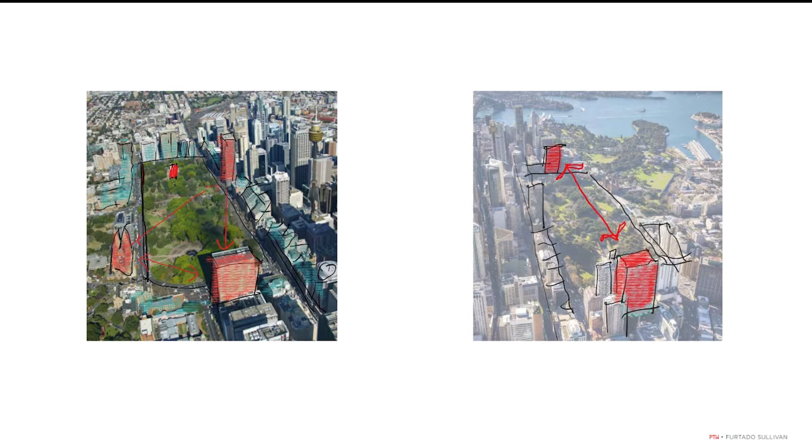We looked at what the appropriate role was for this site. You could take a bookend approach, saying this building should be conversing with the building directly to the north, with some sensible relationship between the two. But that was contrary to the idea of the curtilage to the space being a frame, and a frame shouldn't interact with the painting. So the buildings shouldn't be trying to mark or identify themselves, they should be trying to become part of this reasonably inert curtilage to the memorial.

So we ended up thinking, well, let's just look at the south side of the park. There is some unusual consistency between each of the buildings. Yes, you can't avoid the fact that the envelopes and the axis required this geometric relationship with the memorial, but you can compose the building and its materiality and form with the neighbouring buildings, and that was the approach that we took.

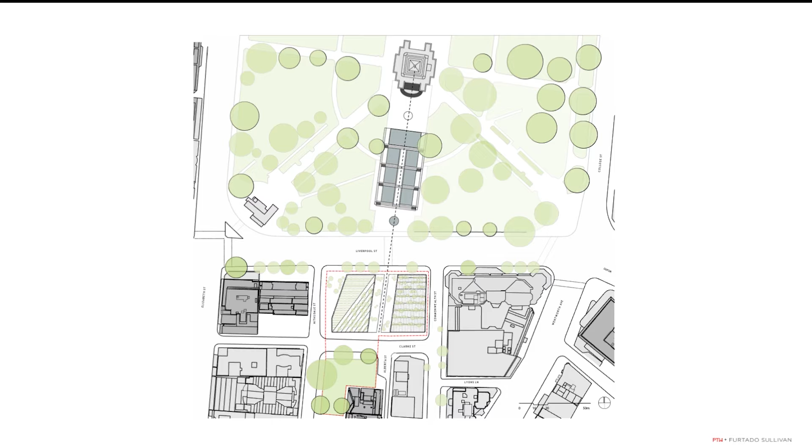At the ground level, we tried to use the geometry of the space to generate the forms for each of the buildings. One of the challenges with the building envelopes was their unusual geometry, and we looked at the geometry of the park, the relationship with our site, and came up with a strategy, which I'll let Sandra talk about, for how we were going to achieve the GFA without an overly busy architectural form.

So we ended up with this composition, and I have to say, even now looking at this, there is too much similarity in the axial composition between the buildings and the memorial. It's very, very difficult. I don't know what you can do with this, because we're trying to respect and enhance the memorial, and we have this fundamental composition which is generated by the memorial. So it's an extremely difficult architectural problem. I think our approach of taking a muted, curtilage-type relationship with the adjacent buildings was the right approach, but there is this fundamental challenge in the nature of this site and its relationship with the memorial.

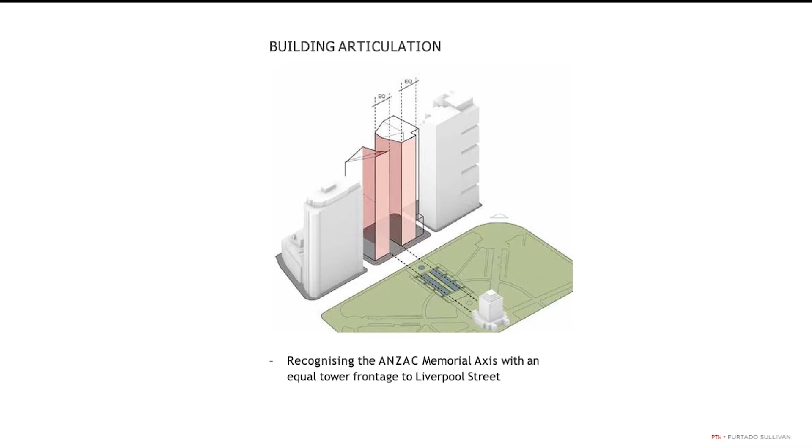Just very quickly to talk about the basic strategy to our massing: we have the stage 1 DA envelope, and we have the requirement in the competition for daylight to come to the central breakthrough on the axis. We ended up taking this approach where we broke the building into two. You can see on the left-hand side there's a bump coming off the western building - we thought that was undesirable. It would be better to have simple, pure forms to calm the composition down. We generated a form by looking at the viewpoints from the memorial, which created an angular axis allowing us to achieve the optimal GFA and remove that bump. So that was our basic strategy.

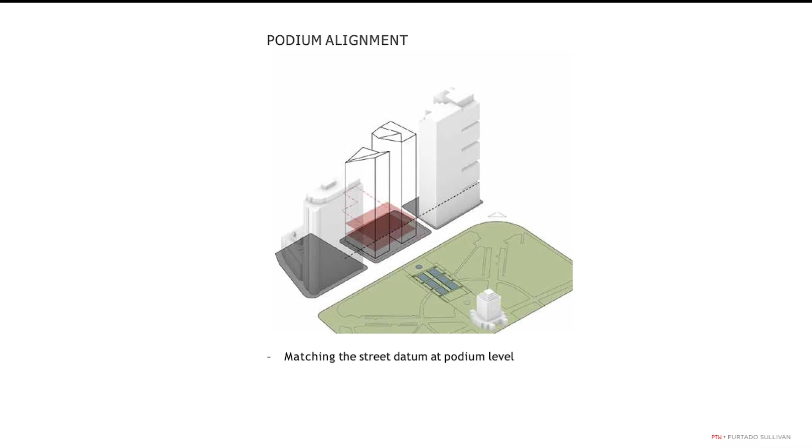Over to you, Sandra. Thank you, Simon. The other strategy was to acknowledge there was a requirement for a podium, and while we wanted to bring the towers to ground because we wanted to simplify the relationship between the tower and the podium, we still wanted to have something within the building that created that recognition, sitting broadly at the podium where it was defined.

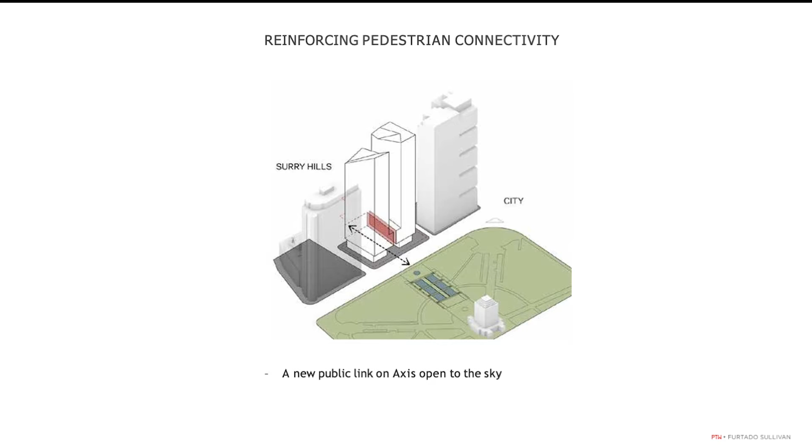The one thing that Simon broadly spoke of was the notion of recapturing the GFA that we had lost by being almost too anal, if you'll excuse the English, about having these two frontages equidistant and therefore achieving the perfect geometry.

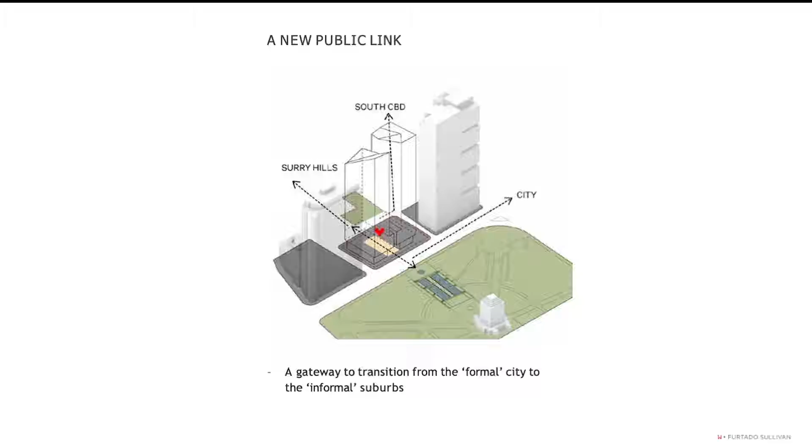So we decided to fill in what was originally meant to be a celebratory space in a plaza, turning it into a through-site link. That link really created two different worlds: the world of the city and the world of the neighbourhood. We didn't want the space between the two towers to be a place to stay and look upon. We wanted it to recognise the axis, celebrate the axis, but be a point of arrival and departure.

That created different types of characters for the different places within the master plan. The final piece in the articulation of the volume lay in how we treated the roof. There was a very strict height plane to protect sun access to Harmony Park, and obviously the always-needed GFA - and the more GFA you have at the top, the more value there is. So there was almost this intricate cut and articulation of the top of the towers to achieve that.

So, simply, the way the diagram of the tower works in its northern elevation is described here. We had two rounds in this competition, and had the opportunity to refine some of our ideas in the second round.

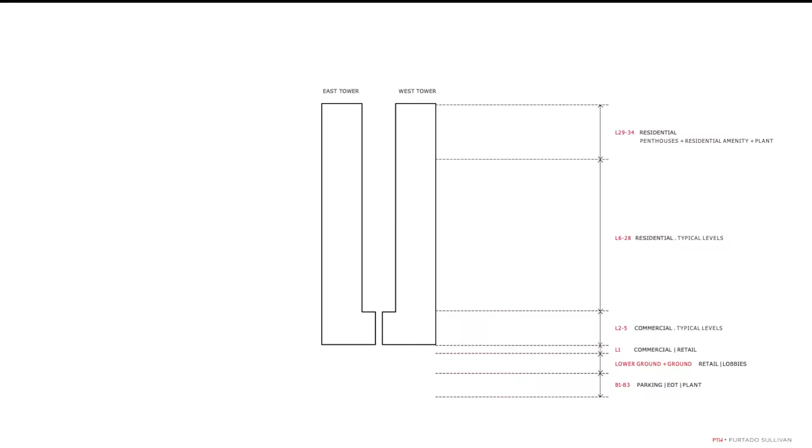One of the comments raised by the jury was the potential lack of time we had to really resolve the ground plane, and also the notion of the diagram of the tower coming to ground - what it meant in terms of weight and materiality, and how it related to the streetscape, so that you really understand the diagram of the tower.

There was a real desire to have a very simple, calm facade, as Simon mentioned. We used the same modulation grid because of the proximity between the towers, but had a different strategy for the facade in the middle.

The only thing to note, especially in high-rise residential, is that it's very difficult to obtain proper fresh air into the bedrooms. What we did was effectively create Juliet balconies for every bedroom so every room had proper fresh air. This is really the way the tower is represented from the south, and the ground plane, with the different characters within the street.

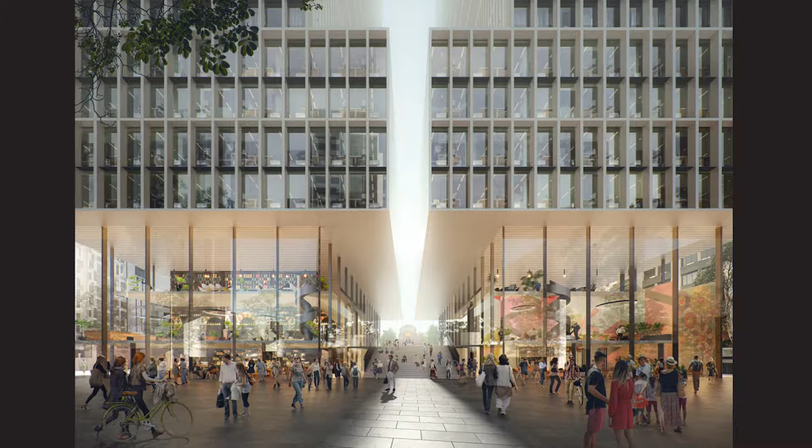It's very hard to understand exactly what we did in terms of acknowledging the axis, but it was this notion of these two podiums almost touching together, using light to come to ground to really celebrate the movement. This was the work we did on the second round, where we felt there was perhaps an opportunity to humanise and create a more human scale on the plinth, by creating a plinth on the tower.

And just very quickly, the two images that describe effectively how the scheme came together towards the end. Thank you.

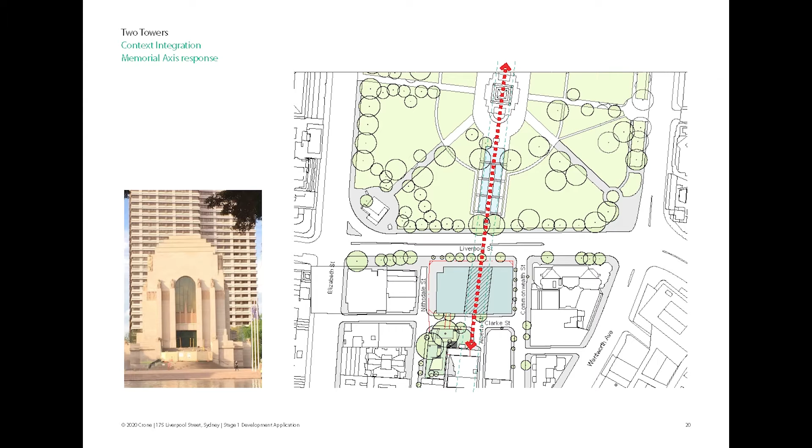Beyond the fact that adaptive reuse of the existing tower wouldn't comply with minimum floor plate sizes for residential, cross ventilation and solar access become extremely problematic. Working closely over a journey with a relatively small team of Crone, Ethos Urban and others, we collaborated closely with the city to find an urban outcome of benefit for the client, but also for residents - particularly those south of this site, where solar amenity is significantly improved.

I think as an incumbent stage 1 DA architect, it can be challenging. Sometimes there's too much baggage moving into the competition, questioning every move based on conversations about technical constraints, and also the fact that because it's a complex and extremely sensitive site, you show your cards at stage 1.

There's a very intentional response to materiality, to the formality of the memorial axis, as a response to Sydney's colonial heritage, both formally and materially. So thinking about how you then evolve that thinking into the competition...

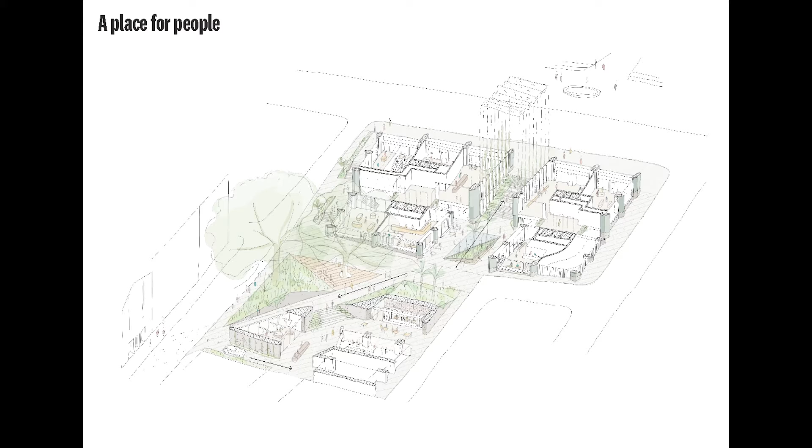Down diagonally from the site, just to the southwest, is Australian Hall, which was where the Greek community opened up their facility during the freedom protest in 1938. But it's so significant - in immediate proximity to this site is a very significant location for the local Aboriginal community, so we thought there was potential to deflect that strong axis through the site using landscape, to then direct it through to Australian Hall, down on the bottom left.

Okay, next one. So deflecting the axis - this powerful gesture of the axis. We looked at various things in how we resolve the design, a sort of stacking strategy with a tightening grain at the top of the building, maybe counter-logic, and just having that very clear expression of the void in the sky.

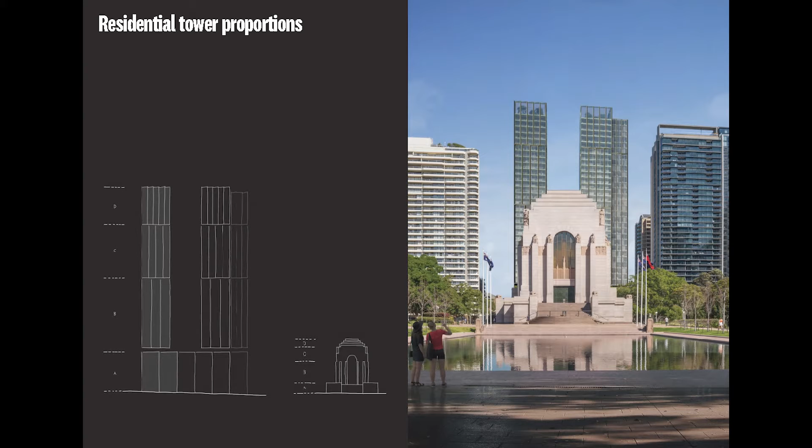The stepping form persisted, I guess, from... It's really interesting to see in the previous scheme the resolution to avoid that, which is quite insightful.

I guess here is the stage one DA aspects that were so strong from the concept DA, but we thought maybe we could just inflect that northern end of the facade to pick up on the fact that the axis of Hyde Park is not perpendicular to Liverpool Street - it's actually about a 7-degree offset or something. So we thought that was a potentially strong generative aspect in the design.

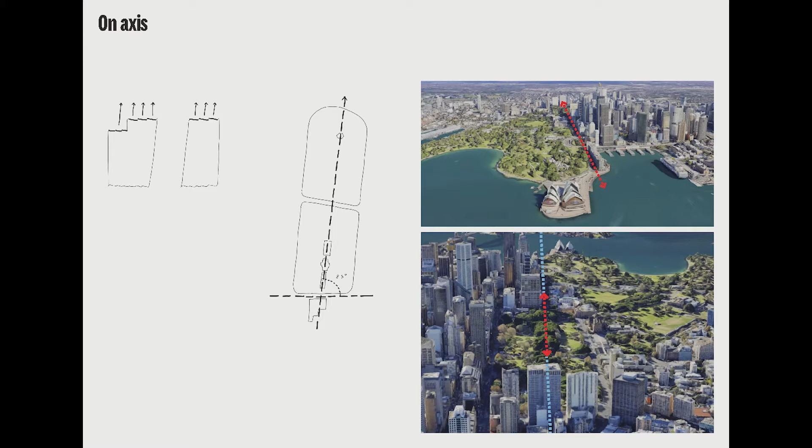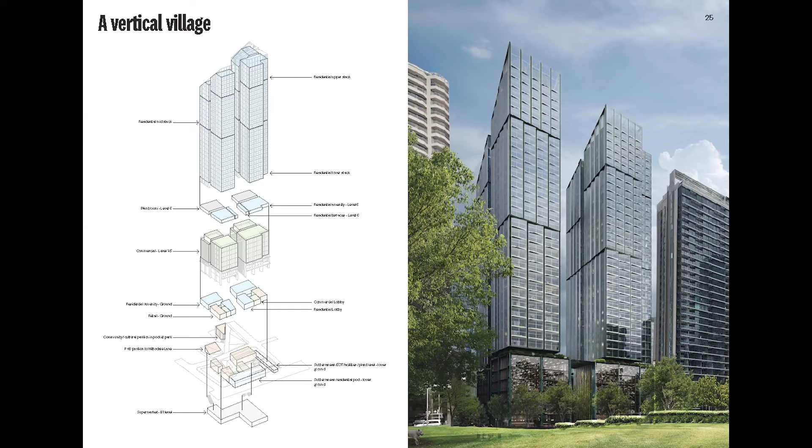Probably ultimately a fairly glazed tower, I'd say. Yeah, very high glazed ratio. In hindsight, let's flick through this and we can see why we didn't win the competition. But in saying that, I think we're extremely proud of the conceptual framework, and given the right execution of that conceptual framework, this could have been an amazing project. It's that sort of leap from urban design to architecture that maybe didn't quite translate.

Simple floor plate, serrated facade on the edges to try to capture the axial views. The value of the northern view and the northeastern view in Sydney is so powerful - this is a dress circle site, which you can see resolved through the floor plate. That simple cross through the middle area, and then with the break either side, so a real breadth into the core of the building.

I guess it's sort of interesting to see this asymmetrical height plane, how that resolves against the logical ultimate formality of the building. I think it was certainly a challenge, because it's quite a radical formal requirement, but the conflicting requirement is this very calm backdrop to the memorial.

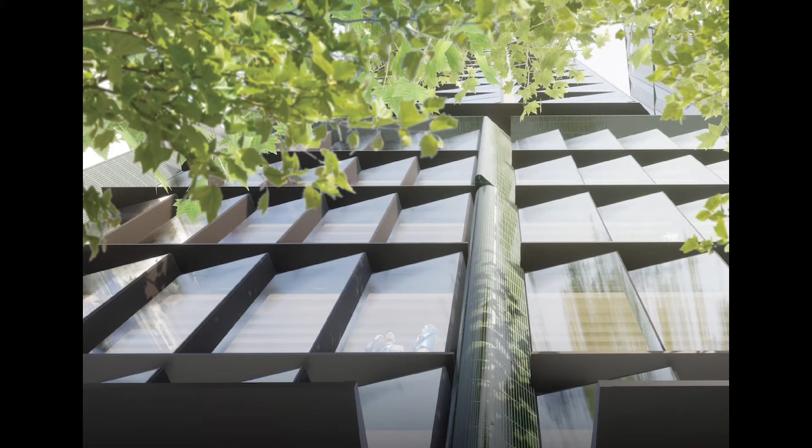I guess the presence of, what were we going to say about the podium? It's kind of the opposite of that. It's that really recessive response, picking up the tones of the park. We know that the greenery in Hyde Park has formed a recessive backdrop to the memorial forever. So why shouldn't the building?

As I said, stage one explored the idea of a warmer toned Sydney building, and this was intentionally looking at the buildings next door and saying, maybe that glassy backdrop with some deep green quality materiality in the podium is a better response for this location. As an aside, it's hard to win a design competition with a green tower. A lot of people lob them out there, but they never seem to get up.

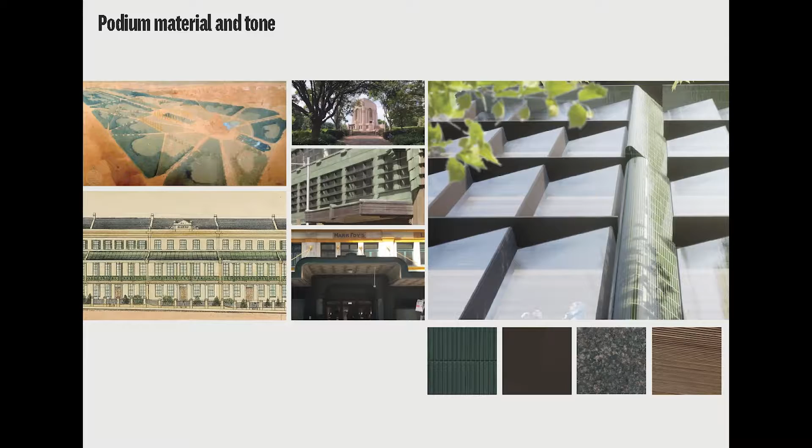The simple materiality, responding to the original terraces that were on the site. Generous thresholds, eaves.

Trying to have a sense within that central space, which was the compromise in the previous scheme, rebalancing that GFA to compress the central space, which had a certain intensity but maybe opened the view to the memorial. Sky curtilage around the memorial was valuable, and trying to have a sense here of that character of the arbour of Hyde Park brought into the site was positive.

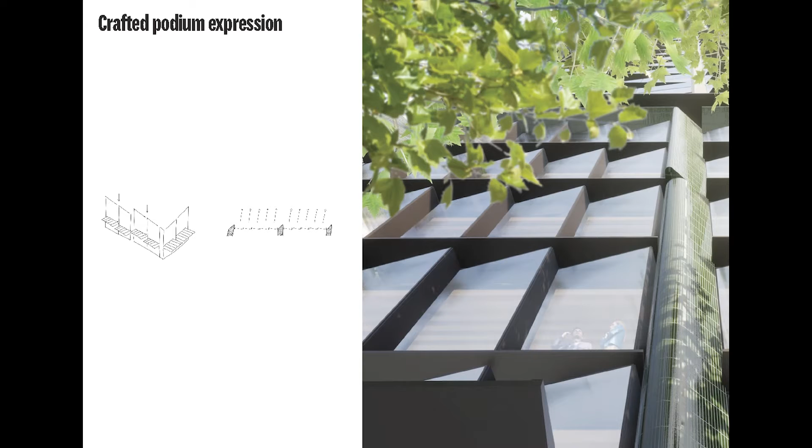Crafted podium expression. This moment where that axis deflects, back towards Anzac House, which also relates to the sort of asymmetry at the top of the tower.

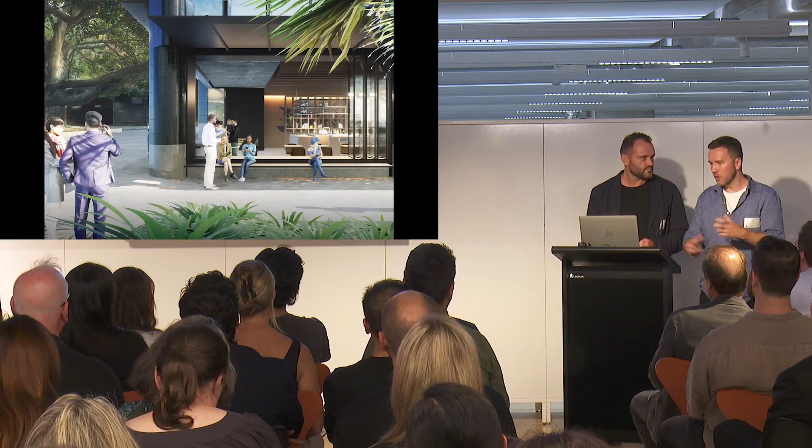The key difference there was bringing the stair down directly from Liverpool Street so that the public space belonged more to the Surry Hills threshold than the CBD. The thought was, if this wants to be more vibrant with activated bars, then maybe the sensitivity of the Liverpool Street frontage is better left alone, and you come down more immediately into that precinct that then has the potential to evolve to the south.

And the sort of intimate tone of various small tenancies, etc. Thank you.

So we started by recognising that we needed to reconcile the formality of Hyde Park and the Beaux-Arts axis with the sort of gritty urbanism on the other side of Surry Hills, and how do we do that? And then we spent a lot of time thinking about how do we respond to Dellit's memorial and really that formality, and how do we create a very calm civic backdrop to that building. I guess you'll be the judges of whether we were successful.

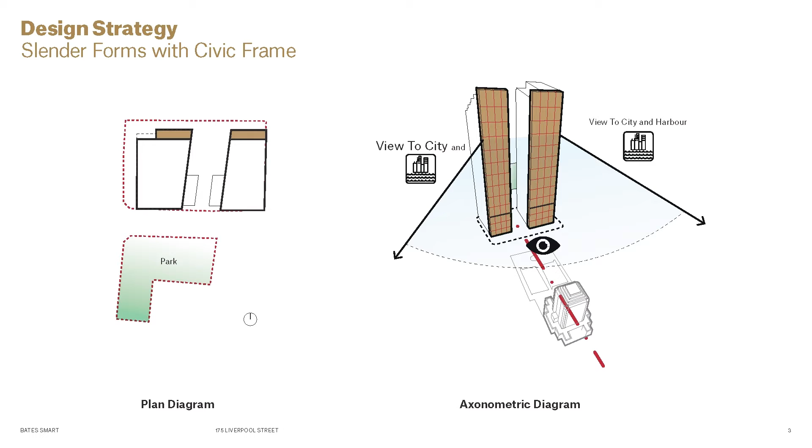We started, and you've seen similar responses, by creating a pair of towers that were identical, recessing the western edge and creating two very calm civic frames behind the War Memorial, picking up on the materiality of the War Memorial. The base uses the actual stone of the War Memorial before progressing into a precast that is tonally from the War Memorial.

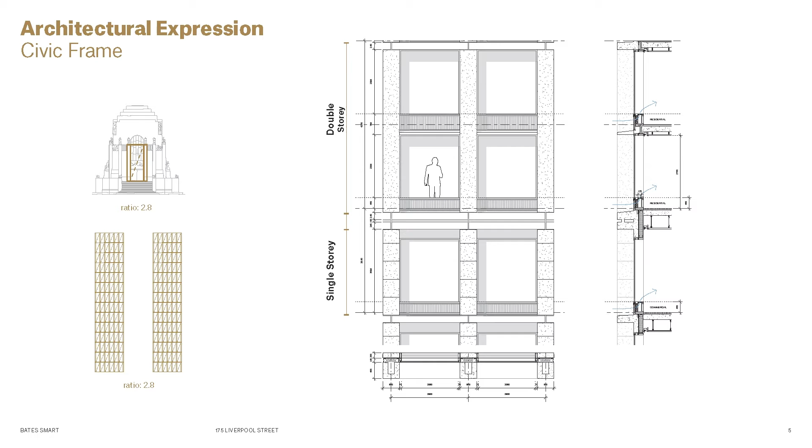We took the proportions of the War Memorial. We spent a lot of time studying those proportions. We took those into the tower. You can see here, this is the precast, and there's a double band where it breaks into the podium. So those materials and proportions are used.

We actually spent a lot of time in the competition, Sally and I and other members of the team, sitting on this park bench and imagining what a pair of towers that framed that War Memorial would be like. And we were after something that was calm and very civic.

And then from the other side of the memorial, you can see those towers come to the ground. The important thing we did was widen the podium base and create an urban room that acknowledged the axis of the War Memorial.

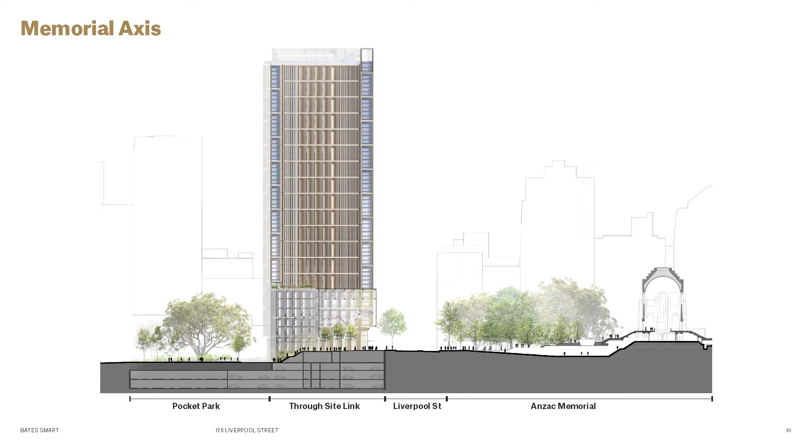You can see that urban room, it's 17 metres wide and it's on axis. It takes the full thrust of the space of the War Memorial into that space and creates a north-facing urban room on level with the War Memorial, and before it cascades down into Surry Hills. So it's quite a formal space.

There is a glass screen between the two towers, and you have this wind-protected north-facing space on axis with the War Memorial. We brought the water element through on the other side of Liverpool Street into this room, which is a very calm space with cafes on either side.

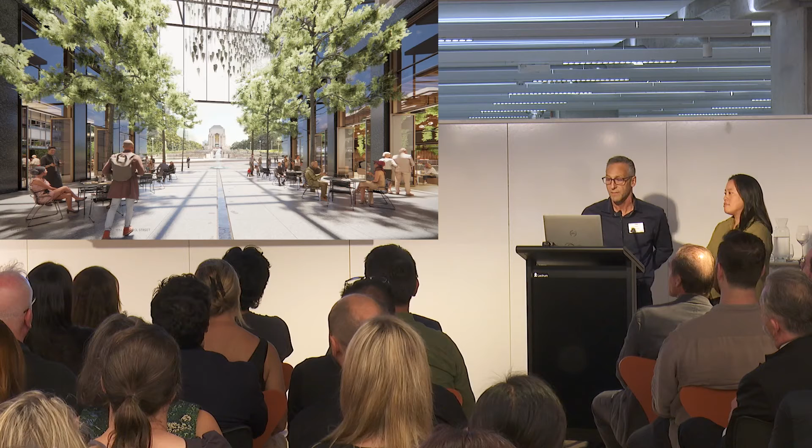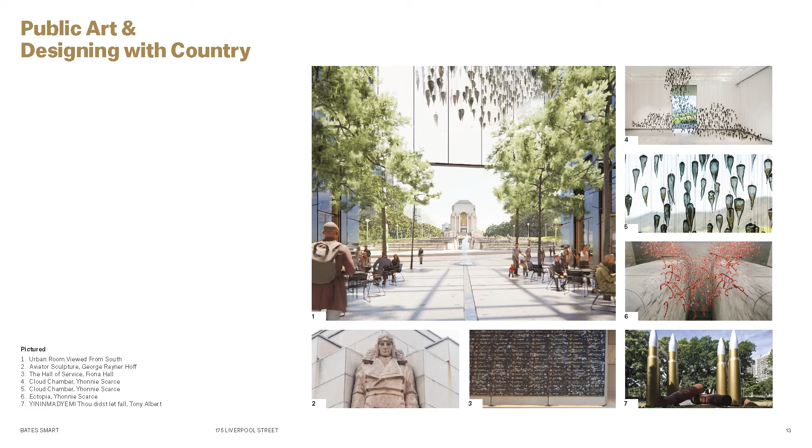We worked with Barbara Flynn, art consultant, and Yhonnie Scarce, artist, looking at an artwork that was hanging in that space, getting that vertical dimension, forming a suite of artworks that, as you probably know, span all around the War Memorial. So we were looking to, and still are looking to, complement those artworks in the bigger picture.

The base of the building, as I mentioned, we were replicating the exact stone that was used in the War Memorial, and we created a formal colonnade that runs along the street. That colonnade again takes the proportions of the War Memorial and creates a generous two-storey colonnade.

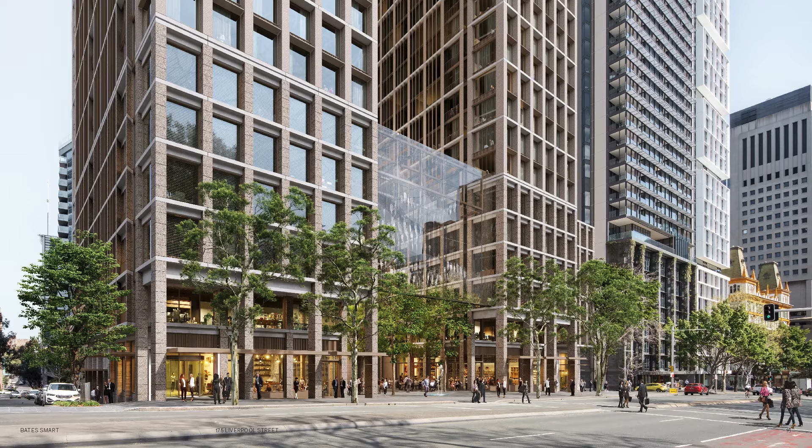You can see that colonnade running through here with the glass screen separating the two towers, and how the podium aligns all the way down to the Mark Foy's building, and then the shift from the stone up to the precast.

The final formal move was we pulled together the buildings to a 6-metre laneway width at the end and created two smaller 6-storey buildings acknowledging the scale of Surry Hills. You can see there, on axis with the War Memorial, it's a nice tight space that came together.

We were looking at a sort of 6-storey warehouse masonry building, acknowledging that Surry Hills typology.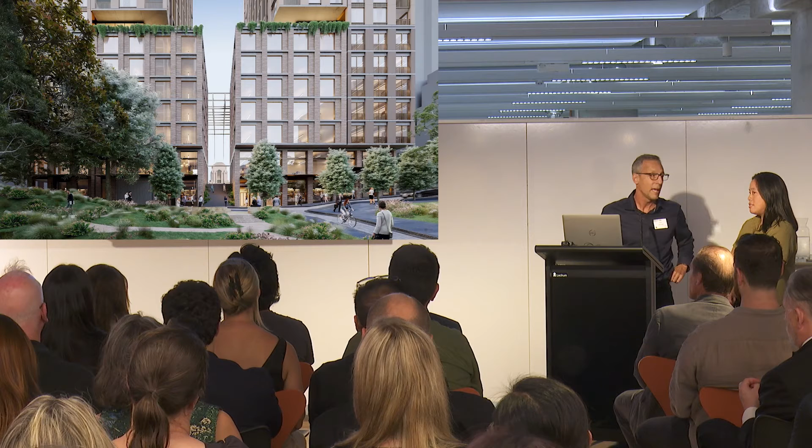We also worked with Sacha Coles and his team at Aspect, and Janice Constable, Design with Country consultant, on a landscape work that had a yarning circle and another water element again on axis, but starting to become more informal as you move through to Surry Hills.

These show the contrasting north and south elevations. The south elevation has the informality of Surry Hills and these 6-storey warehouse-like buildings playing off against the formality on the north side.

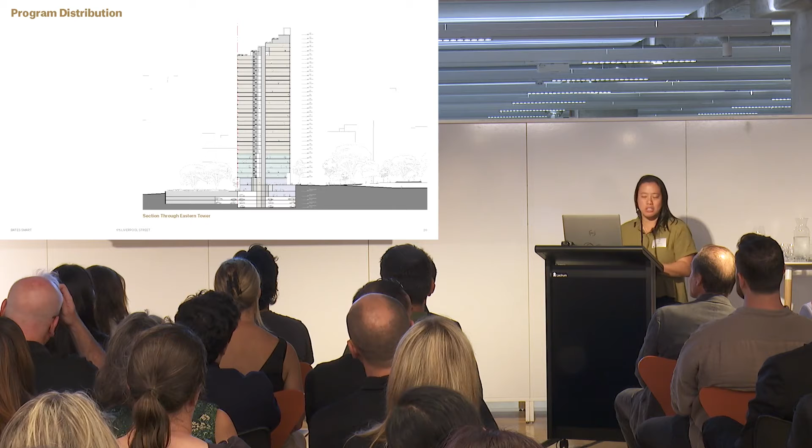The program is stacked from bottom up with car park down below, retaining the existing basement shell, with the southern end provided for the pocket park. We wanted to provide as much deep soil as possible in retaining the pocket park.

Moving up, we have 2 levels, so Pitt Street and Clark Street are a storey apart, and just above and below we've built it with as much retail as possible to ensure the precinct activates. Above that we have 5 storeys of commercial, and from level 6 all the way up to 35 is residential.

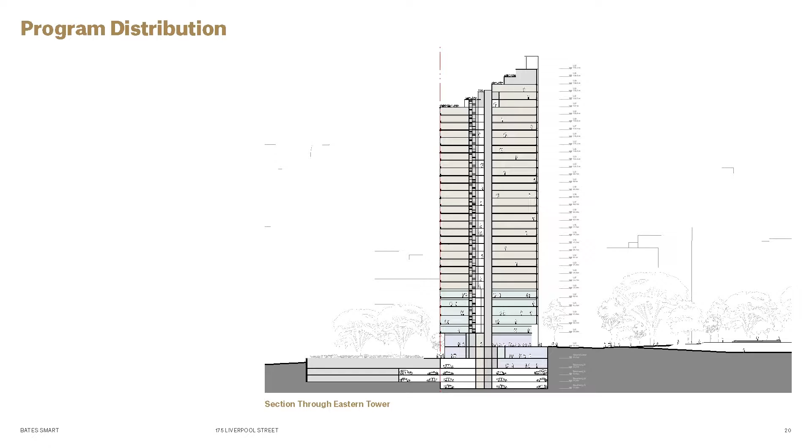You'll see that it tiers to respond to the Hyde Park Sun Access Plane, which we take very seriously. It's our backyard, front yard that we look out to every day, and to ensure there is no solar impact to that. Jumping in here, we're looking at the upper ground level plan.

The memorial axis as introduced by Philip is seen in the middle of the plan here. We've taken the planning control from the planning proposals of 9 metres and reviewed how we can make this most successful. So we expanded it to the north to create a place, and narrowed it down on the southern side to respond to the Surry Hills Laneway.

With that, we've located the commercial lobbies on either side of the towers, having distinct access to Liverpool Street. We also still wanted the residential towers to have a distinct Liverpool address, which is the most premium, so we've located the entryway inside the urban room where number 4 is located.

The urban room allows us to maximise the retail fronting it inside. We've worked with Arup to ensure the wind engineering is optimal so that we could slow down the wind coming through, which otherwise would have been a very strong thoroughfare. Retail is able to spill out inside and also to the north around the colonnade.

As we go down to the lower ground here, this activation across the site is carried through. We wanted to maximise the retail, both upper and lower ground, so you can see that it also fronts to Clark Street, with opportunities for large format retail in future activations.

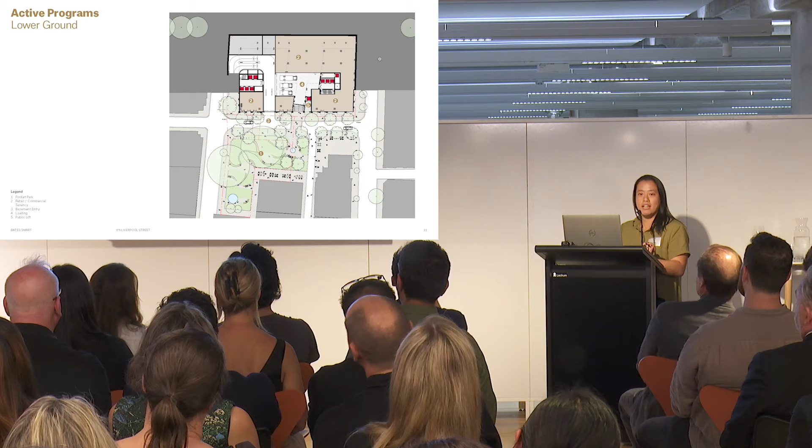We worked with Aspect and Janice Constable to offer an at-grade pocket park, which if anyone has been around currently, it's an elevated pocket park that seems very private. We wanted to make sure that though privately owned, it was publicly accessible.

Connecting with the Connecting with Country strategy, allowing a yarning circle to be a terminus, this echoes a strategy to allow for the southern access to be a journey through a sequence to the Anzac Memorial.

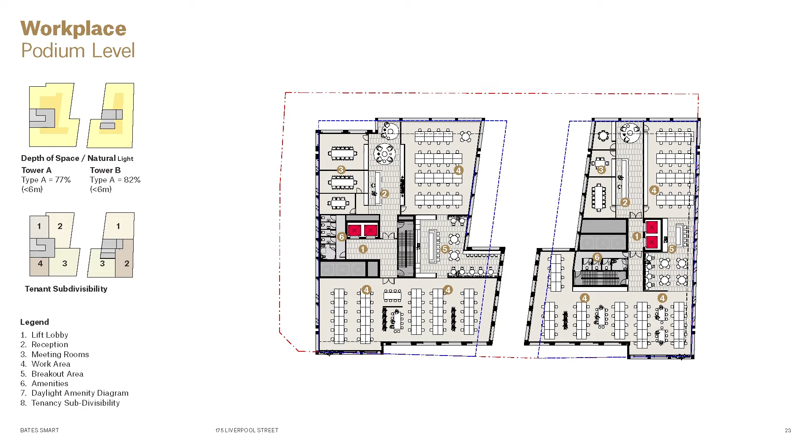As we move up the building, the commercial floor plate was something we were grappling with as we were designing. The previous envelope would have had a very tight building separation. As we introduced the urban room, the commercial floor plate now has opportunities to maximise daylight access from all areas, as well as appreciating that Surry Hills has smaller enterprises that might want to enter in this location. So tenancy subdivisibility is absolutely optimum here.

As we move up, we made a deliberate attempt to carefully curate and design a typical floor plate that is carried from bottom all the way up before we had to step to allow for sun access to Hyde Park. We had an opportunity to maximise views out to Hyde Park and Sydney Harbour, so all of our living rooms are fronting north, or if not, in corner locations. Almost all of our units are dual aspect, which offers opportunities for maximum cross ventilation and solar access.

As we jump into a typical unit, one of our selling strategies was that as we provided a calm backdrop to the Anzac Memorial, we also didn't want any balconies fronting it. So with that, we strategically relocated the balcony that otherwise would have been located in the corner or the north, down on the southern corner.

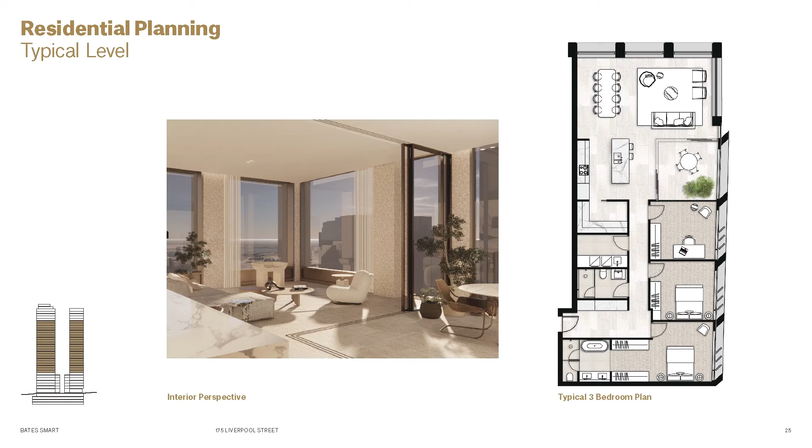We have an 8 by 5 expansive living area for dining and living. And if we double it, including the kitchen and winter garden, this offers a very expansive open plan living suitable for this address. And in summary, we can see it in this render, where this calm backdrop is not only viewed from the outside but on the inside.

The materiality Philip introduced is both on the outside and carried from the inside. Thank you.

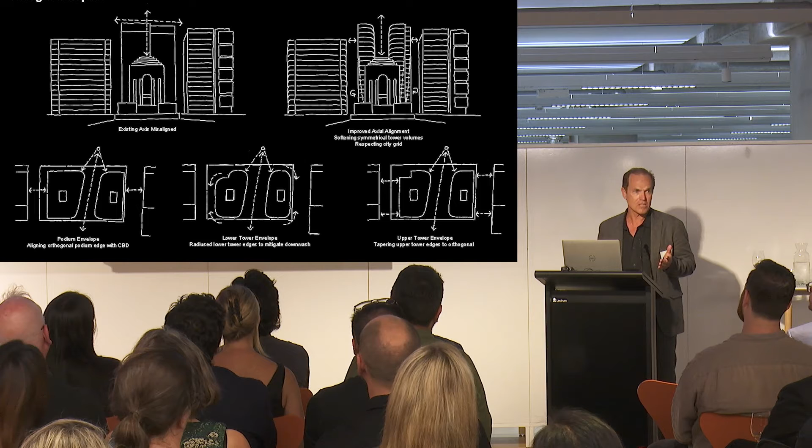I might just start with some of the really early key design principles of the site. Everybody's talked about the mandate from the brief to really enhance the axis of the Anzac Memorial. We noted that there is a misalignment of the axis by about 7 degrees, and so part of the design generation for us was how to actually manage that realignment, and probably soften, as you can see on the top right image, the blow of the misalignment by very soft, curvaceous inner forms of the building, which actually, in a sense, realigned the axis.

We also looked at how lower levels of activity would respond orthogonally on the left-hand image to orthogonal architecture either side of the site, and how in the middle sections of the tower, wind mitigation is a very important issue. We talked a lot to the wind consultants about how to mitigate downdraft into the site and through the through-site link, so radiusing the edges of the tower proper seemed like a really important thing to do.

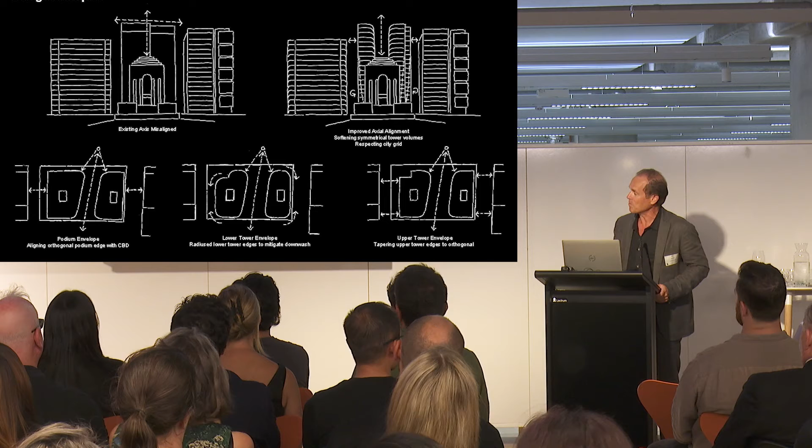But then actually up at the upper levels of the tower, on the bottom right-hand side, to bring the building back to an orthogonal square relationship with the orthogonal buildings either side. So it really did morph its way between the bottom and the top of the site, responding to the context of buildings opposite, responding to the axis which we, in an attempt, realigned with the memorial.

The end result, we had hoped, was to be a soft, discreet and respectful backdrop to the memorial. We spent a lot of time hanging around in the building and sitting in the park, thinking what might best be there to celebrate the memorial without overpowering it. So we elected a very simple palette of materials and a darker tonality, in contrast to the memorial, so it stood out against the backdrop of the architecture behind it.

Again, with the softness of the inner curves of the material realigning the axis, and the softness of the edges as well, contrasting with the buildings adjacent.

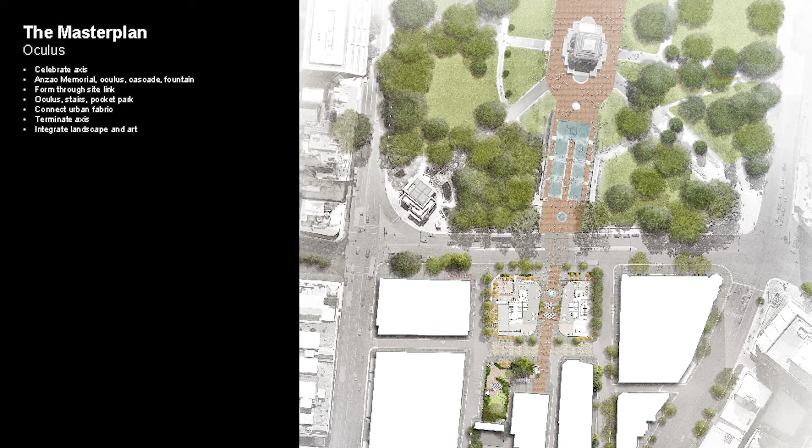So, of course, it all started with a master plan. We worked very closely with Oculus on the ideas of axial alignment with the Anzac Memorial, starting with the building across the cascade, the Oculus itself, and bringing water into an Oculus on our side of Liverpool Street. The axis comes all the way through the park and terminates in an odd space, then turns a corner into the park.

So how can we deal with all that? How can we bury a narrative into the ground plane? That was really important for us. We'd researched some of the Indigenous history that had occurred on this site, and understood there was quite a lot of gaming, and in fact war games, that occurred there at one time.

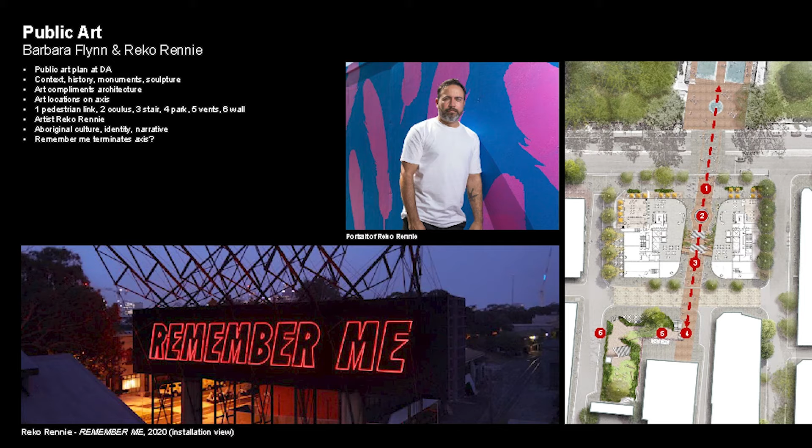So we consulted with Barbara about how to weave art into the narrative of the ground plane, and find places along that axis that would be instant reminders to people walking through, perhaps even a termination at the end where you see a remembrance of the Indigenous past through the site.

To the ground plane, which is king - obviously commercial was a minor part, about 5 levels of commercial at the lower end of the building. We elected to bring our commercial lobbies in from Liverpool Street, where all the action and activity is, and the commercial world facing the park. So 2 lobbies mirroring an Oculus there in white along the pedestrian link.

A retail opportunity on the top left-hand corner, also could have been a bar or cafe facing back into the CBD, with as much activity as possible along the ground plane - which, for people who didn't know the site well, actually descends by about 4 or 5 metres from memory back down towards Clarke Street on the south.

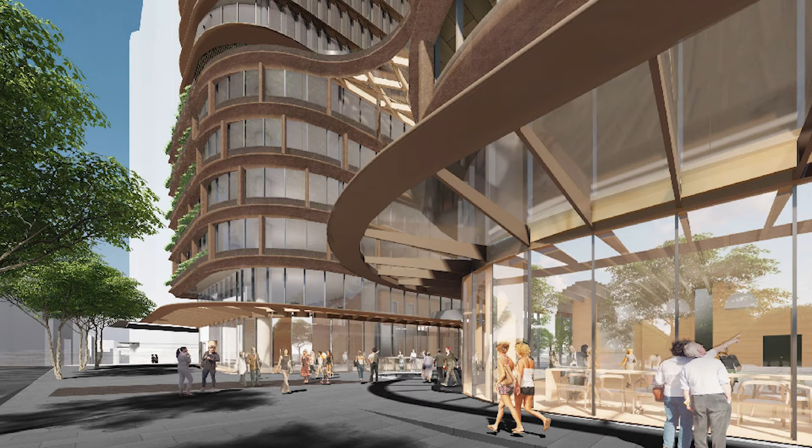So again, those commercial lobby spaces celebrate whatever picture-framed views of the memorial are possible, but become active spaces, be they cafes or bars, doubling into commercial lobby spaces as well. At the Liverpool Street end, people flow through and are invited into the pedestrian link or plaza area, protected from any downdraft from the building by very transparent canopies above.

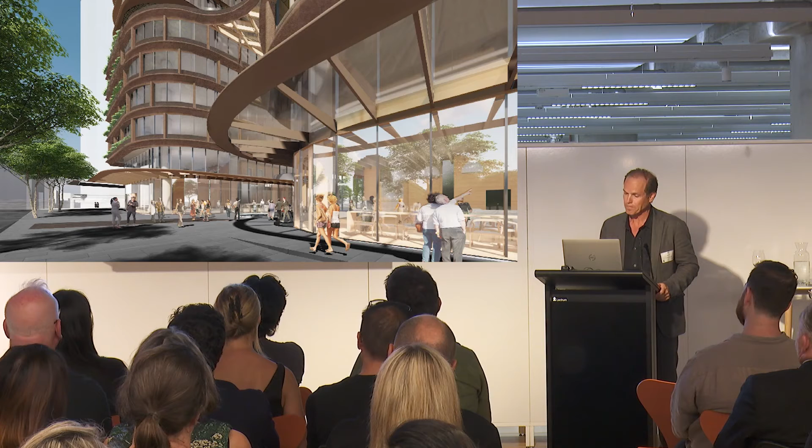Down at the lower ground area, coming down at the Clarke Street level below, this is where we elected to bring in the residential lobbies, with the feeling that it was a more quiet and safer zone to be in than Liverpool Street with all the activity, the buses and the action of the CBD. So you can see 2 residential lobbies mirrored either side of the pedestrian link.

Again, retail activity and F&B activating the Nithsdale Street side, and all the action associated with EOT facilities, bike parking and so on, with a little bike shop happening also in that space below an open Oculus above, going up to the through-site link at ground level. So lots of activity where possible at the lower ground space as well.

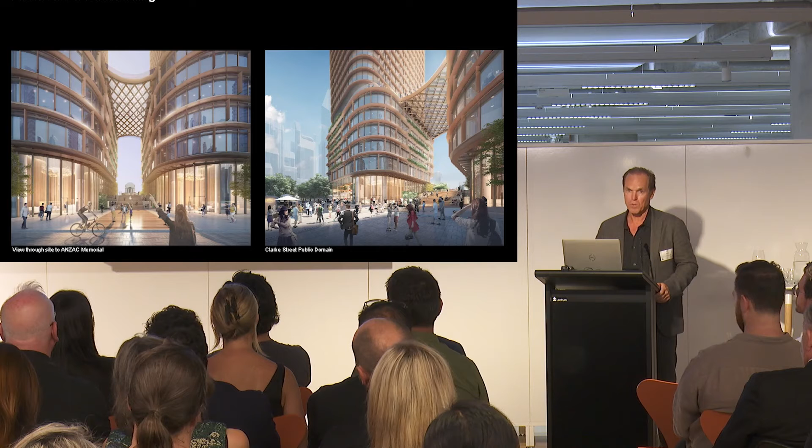By pushing the stair forward towards the memorial, we were able to frame a view - I saw a very similar image in the Bates Smart show - to celebrate the view from Clarke Street of the memorial. It became an amphitheatre, almost a performance space embedded with artwork, framing the memorial, which is another element shared in Philip's scheme: to create a glazed protection from the elements, wind or rain, so the through-site link became an all-weather space.

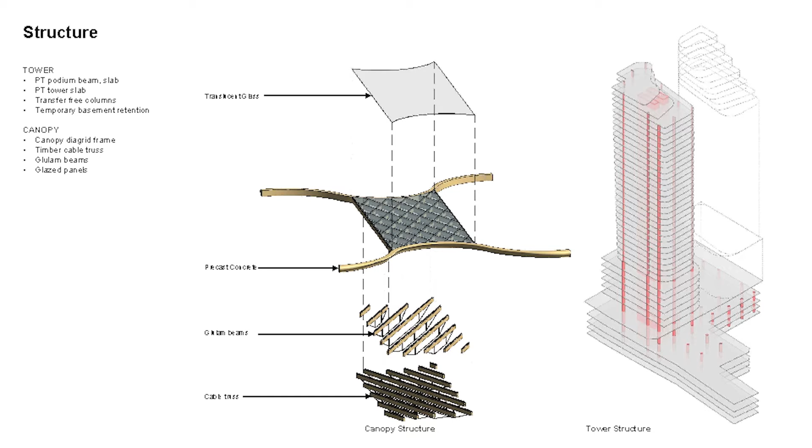That could have been a lot of fun. We looked at timber cable trusses and glass diagrids that could even be trafficable, linking people across the podium spaces. And then, of course, the 5 commercial levels.

There aren't many of them, so they become boutique, essentially, as commercial spaces with paired commercial lobbies either side of the pedestrian through-site link. We did this during COVID, so we buried some little meeting spaces and telephone spaces on the right, giving as much daylight and amenity through northern views across to the park as possible, because we know that from there you can get views across to the Anzac Memorial, right across the other end of the park.

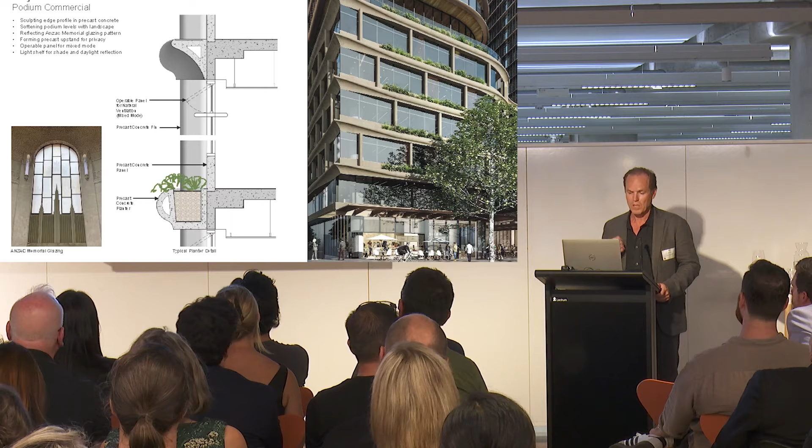Some of the cues we took for the design of the podium were born from the memorial itself. We saw a very interesting split grid facade, which we rotated 90 degrees for this podium. There was a requirement in the brief for quite a high percentage of solidity in the podium facade, so we used sandstone as a soft, discrete material. We buried landscape into the podium facade to draw landscape across the park and into the building itself, and used precast materials where possible against the backdrop of the memorial.

You can see here how the podium was designed to follow the datum line of the Mark Foy's building also across, so the Connaught building became the only building without a podium, but it was important to continue that datum line, we felt. The fun stuff above the commercial levels was obviously a chance to have some residential amenity.

Be they swimming pools, a club lounge, a co-working space, a little theatrette and a gym - all of those were right at the treetop levels with terrific views towards the north. And in fact, we cheated a little bit here. We sent a drone up, and I'm sure we could go to prison for doing it now, but we did that just to see what you could see from 30, 60 and 120 metres and where the best aspect for residential apartments became, and designed those apartments.

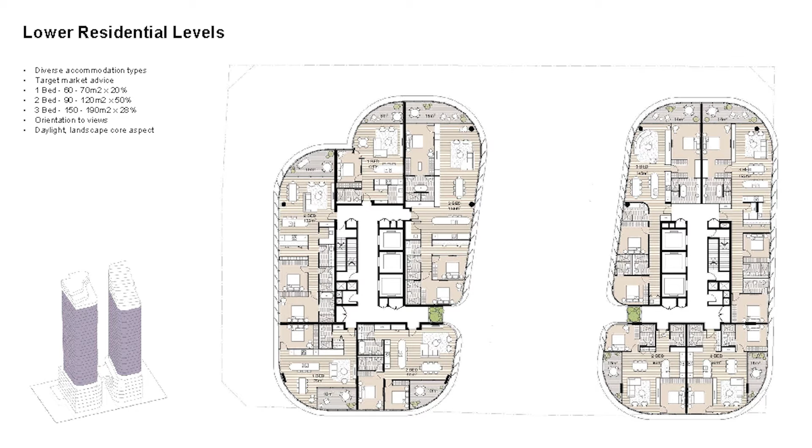You can see on the right-hand side of both these plans, which are the typical apartment levels, the main apartment being a 3-bed one with the better view towards the northeast, packing as much aspect of view and daylight for each of those apartments to the north as possible, even some of them on the south edges actually sneaking a view through the gaps towards the north also.

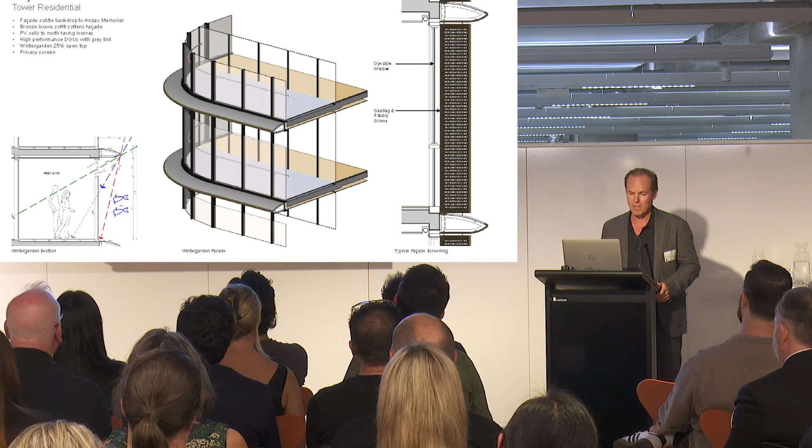How that was done through shading and winter gardens. We elected to use a winter garden technique but with an open top to it so that it became a naturally ventilated space with a bronze bullet awning, which allowed shading for hot northern high sun while allowing low winter sun to penetrate into the apartments.

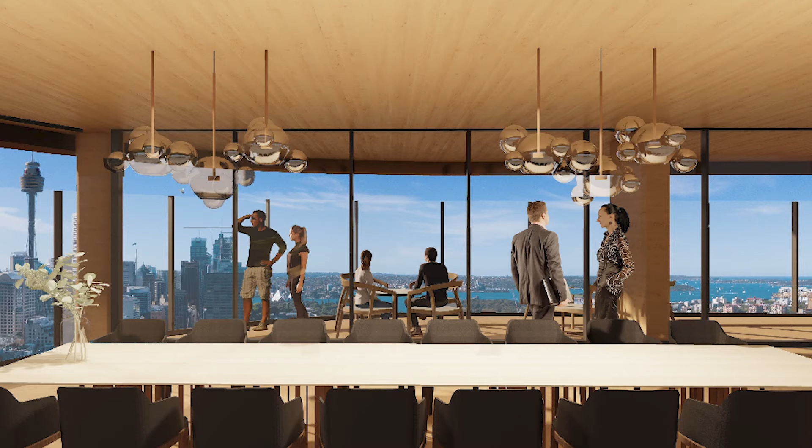And the great fun again right at the top of the building was possibly another sky lounge, something for the high rollers to come visit, and some rentable space for residents and guests to have as a dining or lounge facility with terrific views over the harbour. That's from one of our drone shots, and the inevitable mega penthouse at the top for the really high rollers - just one of them, a 400 square metre apartment with heroic views.

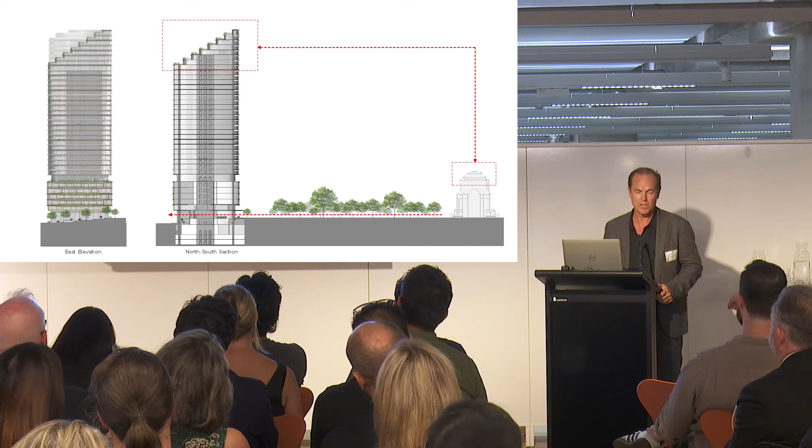This was all about the top of the building, and I think Graham, who's here tonight, somehow kept on saying the fifth elevation, everyone's got to get that right, and I've always remembered that. So we really tried to treat this rooftop as an elevation of the building, and it steps down through the sight lines of the building, but we really tried to imagine that as part of the language of the Anzac Memorial itself, the ziggurat form, which was replicated from the memorial to the rooftop, and in fact used clues from the centenary extension.

Beautiful, beautiful piece of work with some really lovely materials which we brought back into the building - the precast concrete, the bronze detailing and the timber through the building, through the stonework at the base and in the podium, the glazing, charcoal aluminium framing, bronze detailing and timber soffits.

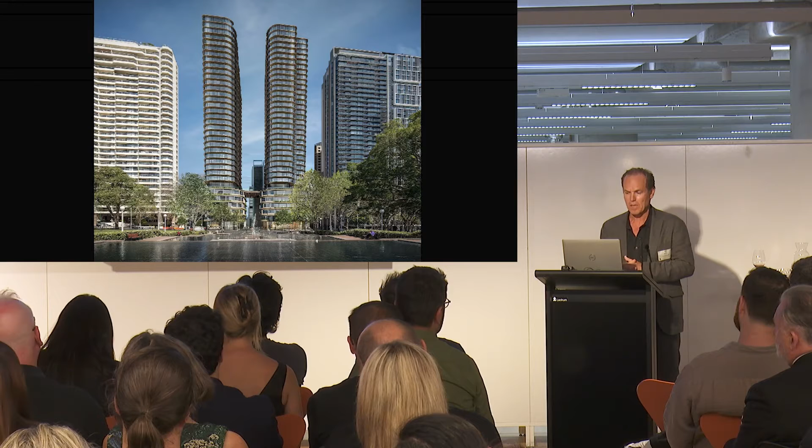So in the end we tried, as I said, to create a very discreet backdrop to the Anzac Memorial, something which is soft and curvaceous, recessive, and has more of the tonality of the Hyde on the right-hand side than the Connaught on the left, because we felt it was probably the best way to be respectful to the memorial itself and create a really lasting thing for the city. Thank you.

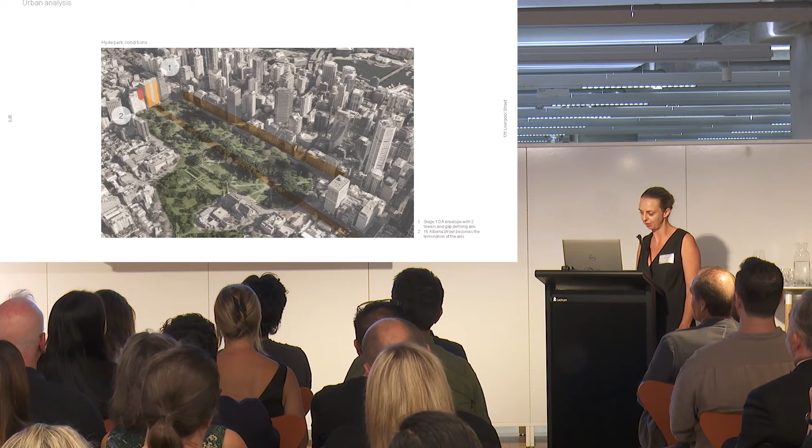It is an extremely important axis for the city. We 100% agree with that. But we did question whether it should be terminated at the back end of Surry Hills by this building, creating a gap.

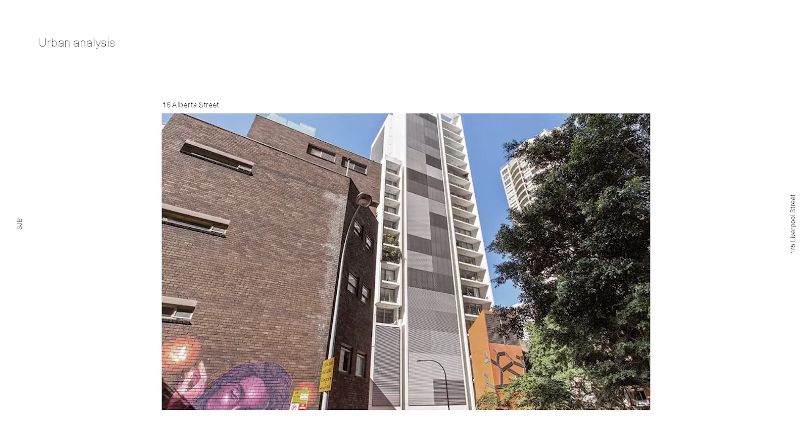The axis, in essence, stops at this site. It is the termination point before it drops into a gully of Surry Hills. And unless we plan to continue a line of demolition through Surry Hills and south, it's never going to exist on this site.

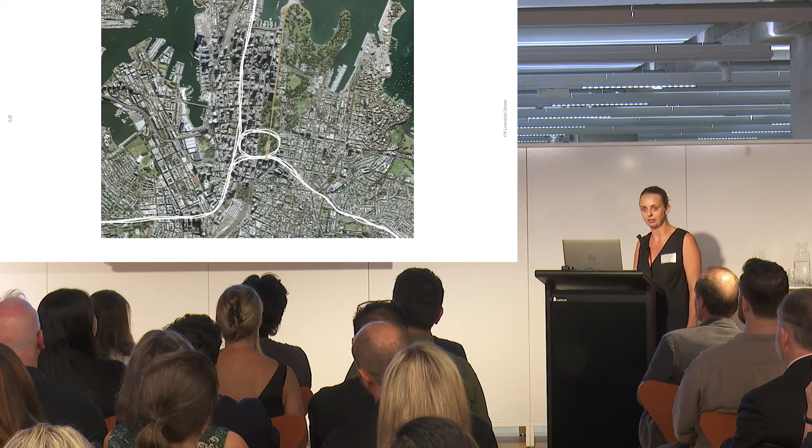And historically, this is also the starting of a ridge line that connects to the eastern coastline of Sydney. It was a First Nations walking track that we now know as Oxford Street, and it also connected around to Parramatta Road. So it has importance for other reasons.

We see design excellence competitions as an opportunity to really push city making, and there's some really key sites in the city that deserve this, and we think this is one. We all have seen how important the axis is.

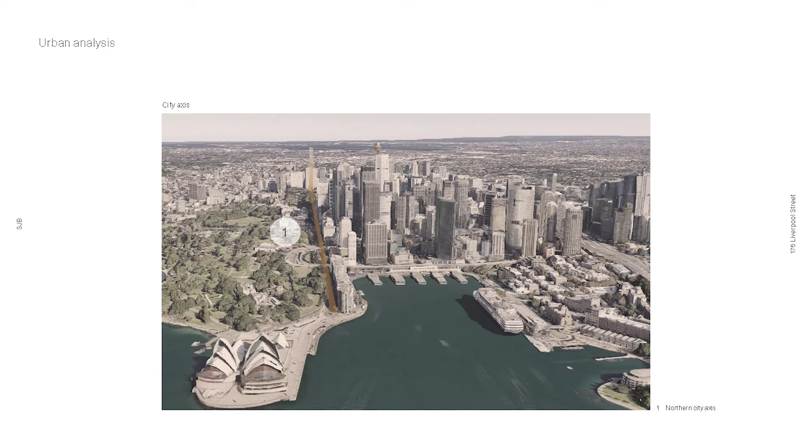Rather than terminating that with a gap, we think we should terminate it with a marker, and we took quite a different approach in the form to achieve that. Not dissimilar to what other European cities do. You build a monument on the axis, you terminate it with something special, you don't end it with a gap.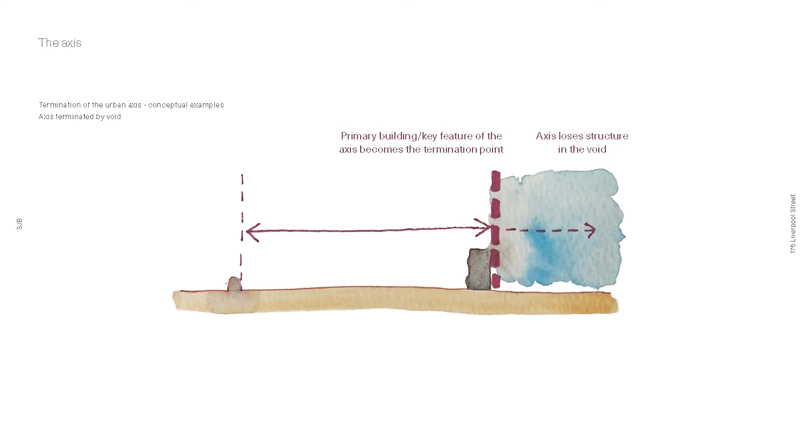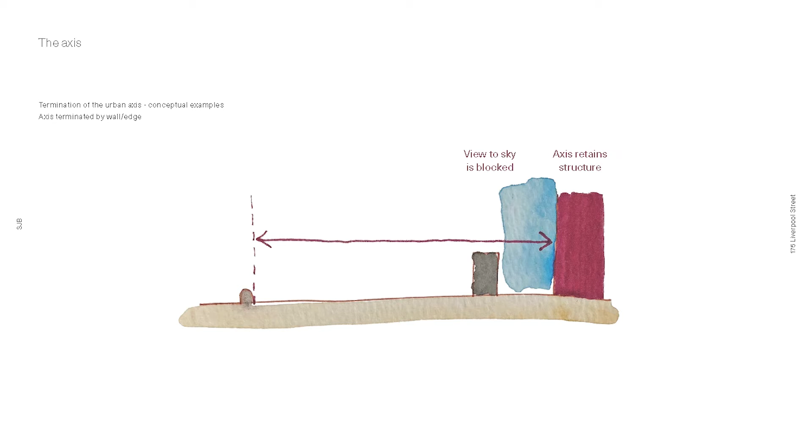In essence, the axis is lost into a void if you take the approach of the stage 1 envelope. In its existing form, it is terminated at a street wall, and this view to the sky is blocked by the street wall. Another approach is to introduce a marker, a singular marker, and make the sky bigger around that marker, which looks like this.

At a city scale, this is a marker that is known and understood and continues the skyline towards the south. It's not a dissimilar approach to what's going on in New York, where super tall, skinny towers with fast-moving shadows find themselves next to a super large public park.

And if we're going to go to the effort of demolishing a building of this scale to build a new building, it should absolutely be the best residential in the world.

We also think that it deserves a public component to the site, so we introduced a full public ground plane and a public observation deck at the top of the tower. Another thing that we don't do in Sydney that other cities do around the world is share those views with the public audience.

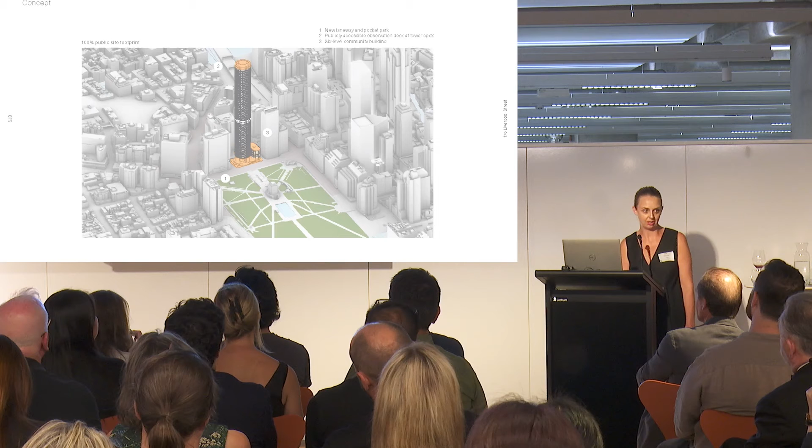We also introduced a small building next to that to hold the street corner, and we saw this as a building that would be gifted back to the city. Ideally, we saw it as a shelter for people in need or crisis housing, because people in need deserve the best address in Sydney also, and we should be judged on how we treat the people most in need in our cities.

In doing one building, it makes us a better neighbour. We were actually able to achieve compliant separation distances with the neighbouring residential buildings. We don't create wind tunnels, and we share the sky. So this is looking at the distances we achieved between the other buildings.

The other thing we've heard is the axis is slightly off north, and it's super annoying to look at. And the only way to resolve that in a pure way is actually with a circle.

So we did a lot of work in the plans. They're beautiful plans and beautiful apartments, as this place deserves. And the integral structural system meant that it was quite flexible and could be interchanged based on market needs or over time.

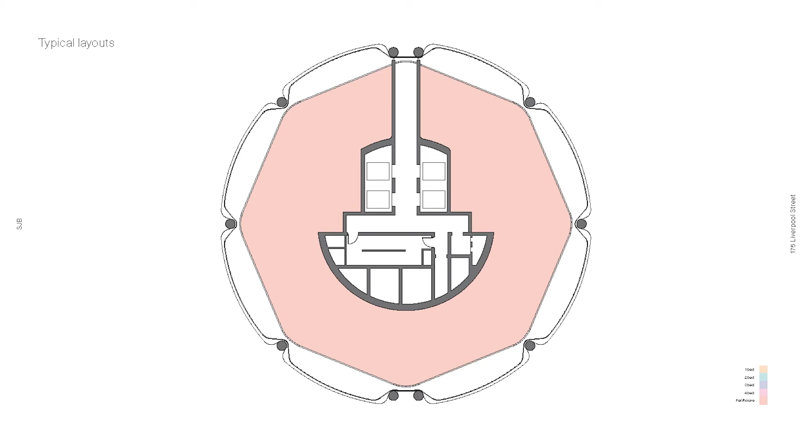It also meant the greater distances meant we were getting solar further into the site. The circle's good for cross ventilation. And not dissimilar to some of the best buildings in Sydney by Seidler, the structure was integral to the design, and it could work for commercial and residential.

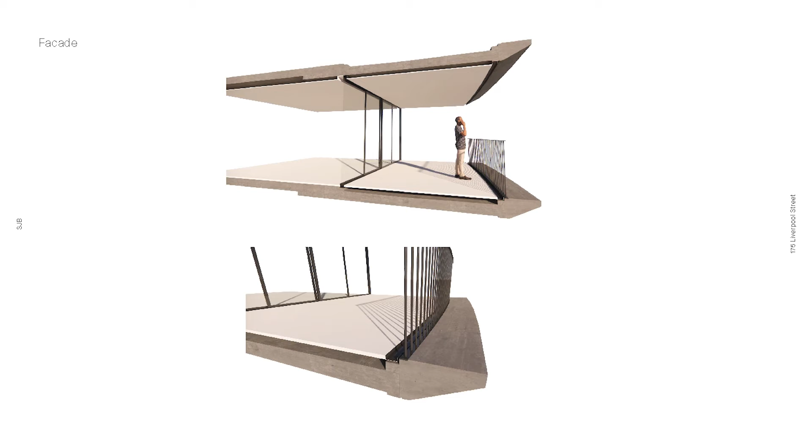We introduced a very simple and repeatable module for each level, and it was all about the veranda and a heavily protected edge for all the residential apartments. And it's simple in its form, and it's repeatable, and we think it results in an elegant form.

We worked with JMD, Anton from JMD did these sketches from a landscape perspective, and we saw the site as a sandstone plinth. In setting this building back, we're actually giving some relief to Liverpool Street, which is a very harsh environment, and creating a little landscape that's extremely Sydney.

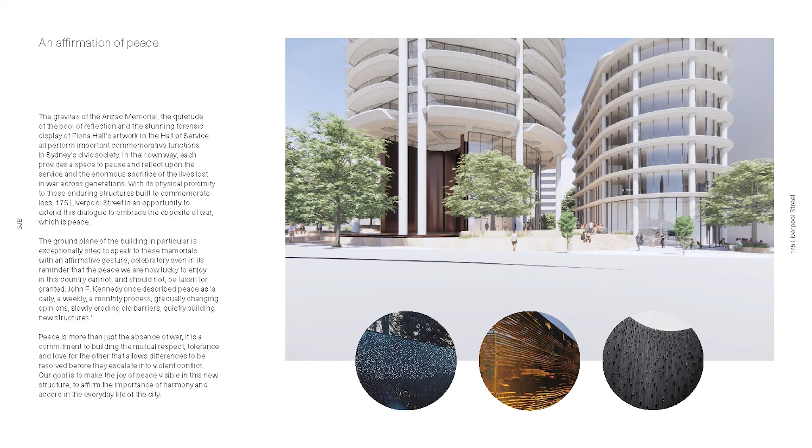We also proposed a 3-story height artwork that would start a conversation with the Anzac Memorial, and in contrast to focusing on war and invasion, this would be an artwork by a First Nations artist that talks about peace and the future.

The landscape also radiated out from the centre of the tower and became a tessellation of sandstone and gardens, and we obviously created the pocket park to the south.

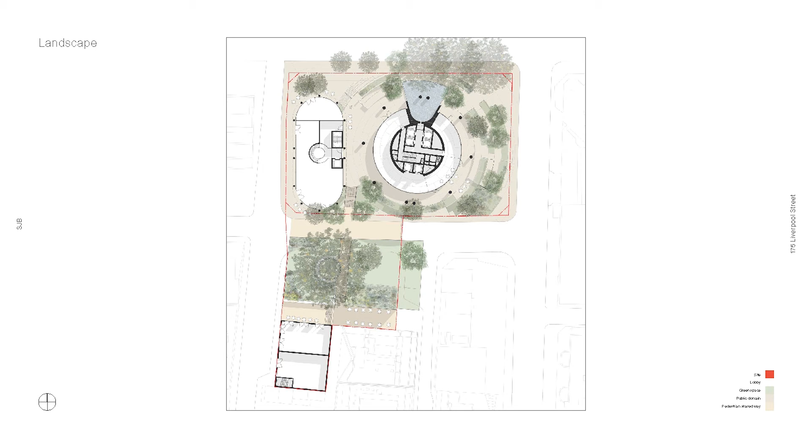The gap between the buildings started the character of Surry Hills, where tightness between buildings is what you'd expect in Surry Hills. So this site is also about transitioning civic scale to the Surry Hills scale and grain.

The material palette is extremely pared back and timeless, and you can see that it touches down as lightly as a 77-storey tower can.

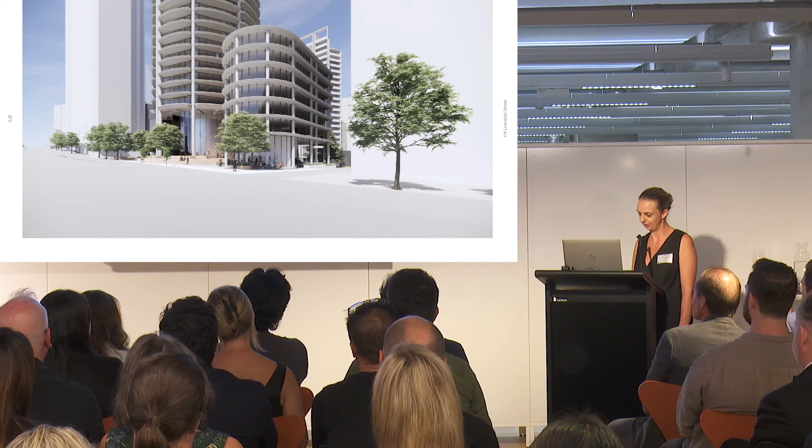And the landscape transitions and steps around, creating pocket gardens for dwelling in for free. The commercial building is having an address to the pocket park as well as to the side street and Liverpool Street, and you can see here the tightness that creates.

We slipped the car park underneath the plinth, entered from Clarke Street, and resolved access for residences separated from public access that allowed people to get to the top of the tower in an orderly way.

The community building was a free plan, and as I said, we had multiple different plans for this to be housing. It could be childcare, it could be a multiple different series of uses, and it could change over time.

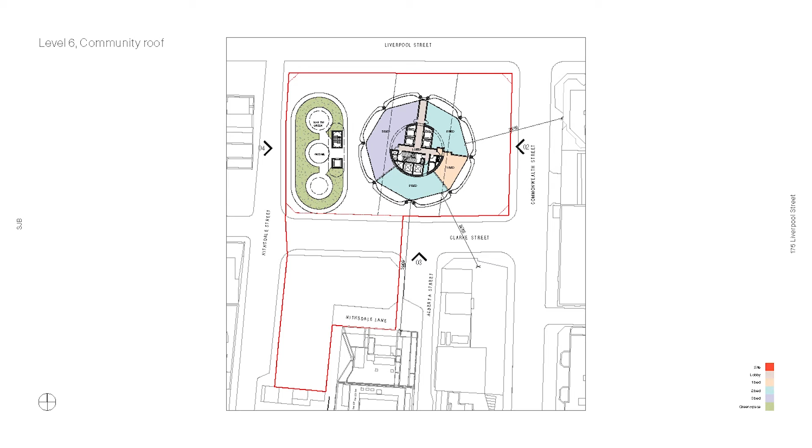Above that, the typical residential levels kick in, where there's a roof garden to the top of the community building. At a mid-level, we had a recreation level for residents with a swimming pool. Top level is the public event space and viewing deck and plant.

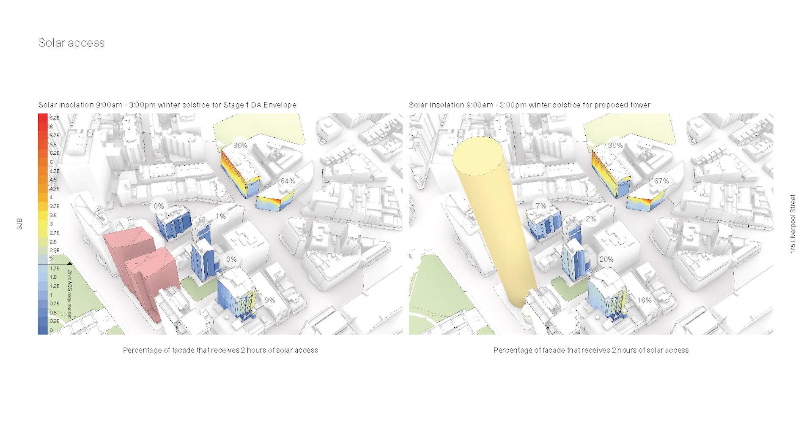To back ourselves up a little bit, we did some analysis on the neighbours. We improved solar access to all of the neighbours quite significantly by doing a singular tower, and we improved the sky view factor significantly by a 0.2% increase of sky visible within 200 metres of the site.